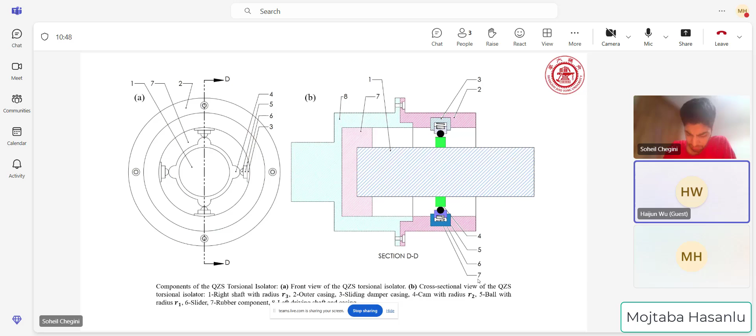My main focus in quasi-zero-stiffness torsional isolation research is on a configuration system like this, which is a kind of coupling. If you look precisely, you can see number 7 and number—an elastic that provides torsional stiffness.

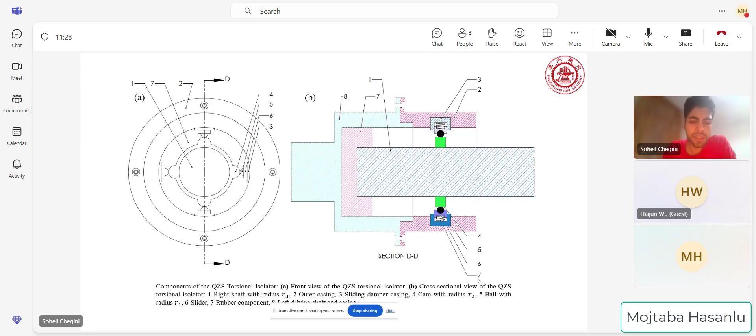Combined with the stiffness of the spring, number 6, you can achieve quasi-zero-stiffness, meaning you have stiffness around zero near the equilibrium point. That means you can lower the natural frequency of the system and achieve isolation at lower frequencies.

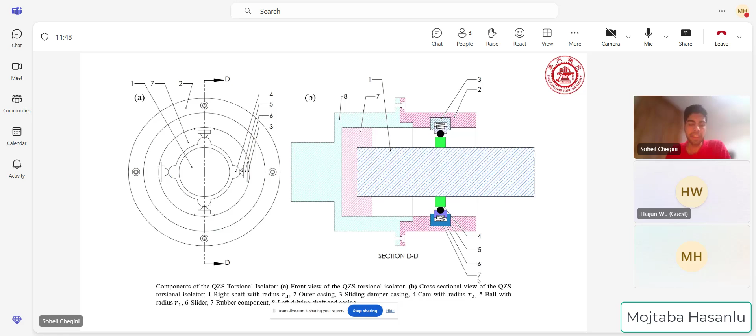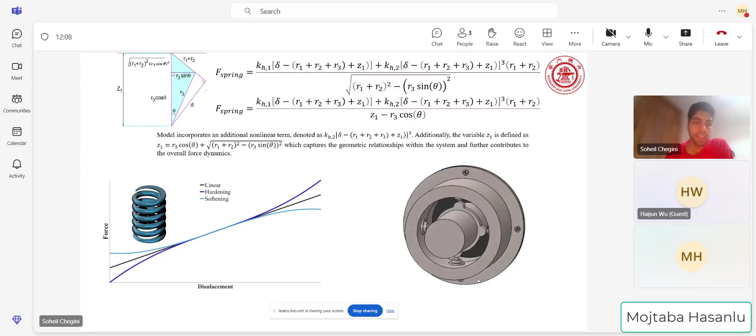This is the configuration of my system and the notation I've used in my research. By calculating the moment of the spring around the central axis and combining it with the torsional stiffness of the elastic, you can adjust the stiffness of the whole system. If you adjust it around zero, you can reach quasi-zero-stiffness characteristics.

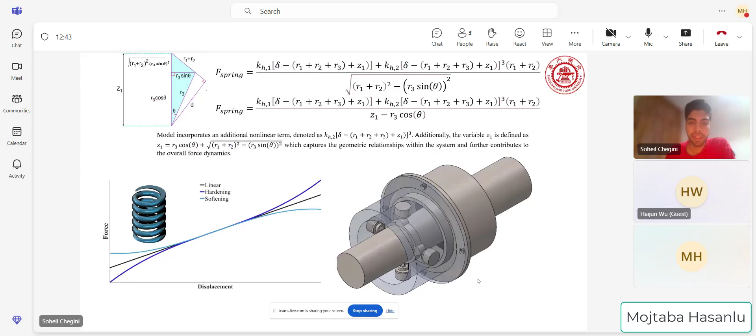My main goal was using hardening and softening springs because of the improvements we can achieve compared to a linear spring. During my research, we saw that by implementing hardening and softening effects for the spring, we can get better results, which I'll show later.

This is my formula for conducting the research. The main feature of quasi-zero-stiffness systems is that their stiffness should be zero around the equilibrium point. The stiffness can be obtained from the derivative of the moment around the central axis, and the moment of this nonlinear system can be obtained by combining the torsional stiffness of the elastic with the spring force times its distance from the central axis.

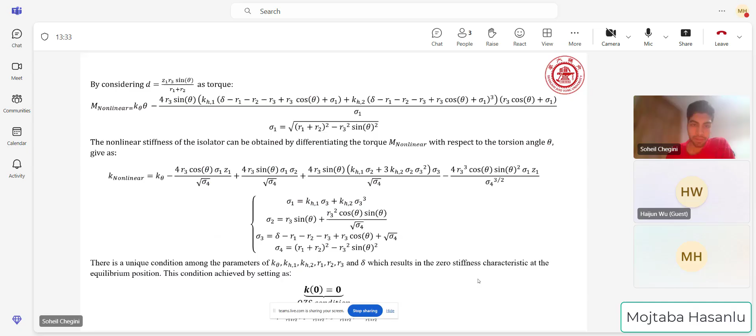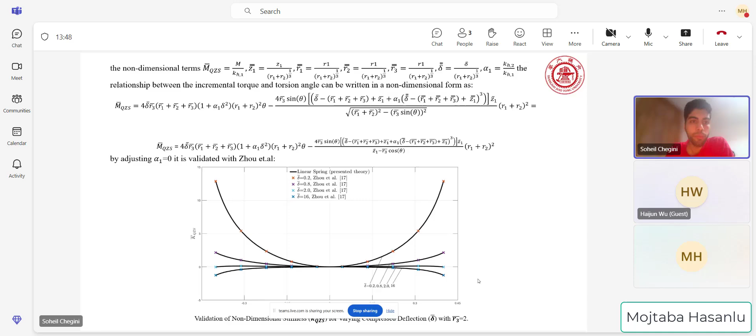It's worth mentioning that if you make your system too softened, it cannot remain stable and becomes unstable. So it's important that the system is not softened to a degree that reduces its stability. If you increase the softening feature of the spring, you can improve the quasi-zero-stiffness characteristics a little, but you must not use a spring that is too softened.

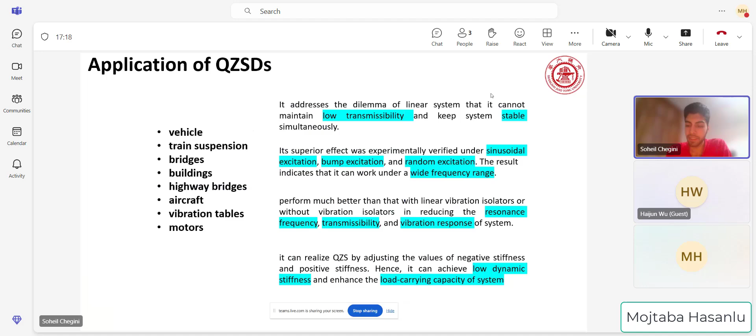I would be happy to use them as devices in many spectra. For example, you can use them in marine applications, aerospace applications, or anywhere you have a harsh environment and want to isolate two systems from one another.

For example, in the context of sensors, you can use materials or any configuration that provides quasi-zero-stiffness characteristics to prevent noise from harsh environments, or anywhere you have torsional disturbance. You can use these quasi-zero-stiffness systems as a device to help increase the durability and healthiness of your system, or prevent fatigue.

I also want to explore the control side of this structure by using a pneumatic or magnetic device instead of a simple spring. You can have controllability over this structure, and make it adjustable to its environment, adjusting the stiffness and damping effect of the device, boosting its possibility to isolate vibration in every environment.

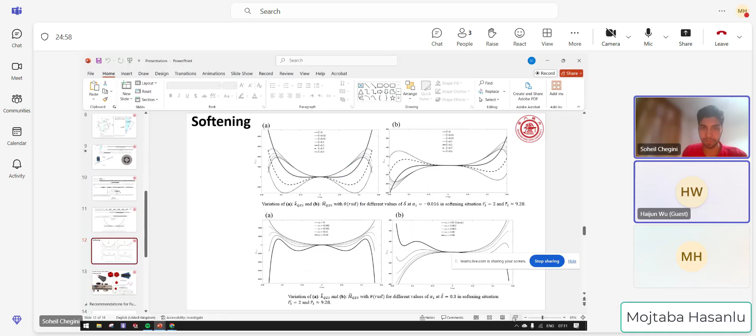I think go to slide 10, 12. Well, okay, slide 13. So you have done research about this. Next, yes, setting, not experiment, it's muffler design. You have also done this kind of research.

So it's about experimental validation, or you design this one? I conducted numerical and experimental research on the absorption characteristics of TPMS metamaterials. So what's the highlight of this kind of design?

TPMS. Do you understand my question? Can you repeat your question? I can understand it. So what's the innovation of this? Okay, I got that.

TPMS structure have not yet been used for a muffler. The main characteristic that researchers and scientists explore and investigate is their acoustical characteristic, but they have not yet been used in the context of the muffler, and they have not researched the STL, or sound transmission, of this structure compared together.

The only work that has been conducted, I think, is on a simple panel of this TPMS or double curve of this structure, and they only considered the normal and radial sound dissipation across this structure.

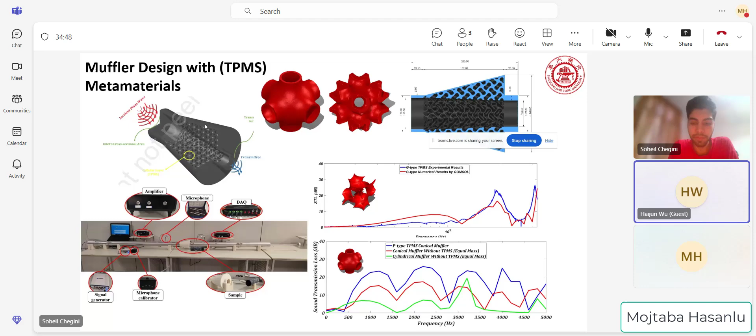Okay, so can you go to your research plan next? This slide you mean? No, previous. Yes, this is isolation, right? Yes, this is a different configuration of torsional isolation.

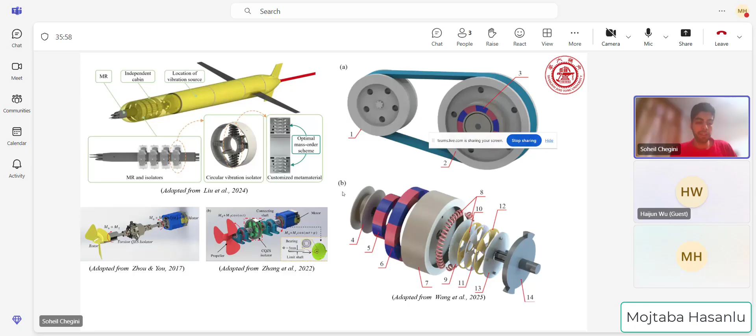Two figures below show a marine application of quasi-zero-stiffness isolators. You have propeller and motor. If you have a harsh environment around the propeller, for example because of the bad situation of the fluid, you don't want this vibration to go to the motor, you want it to dissipate in the middle domain. By designing a torsional quasi-zero-stiffness isolator, you can achieve attenuation of this harsh environment effect.

But it's a little bit different from our research, so let's go to the next slide.

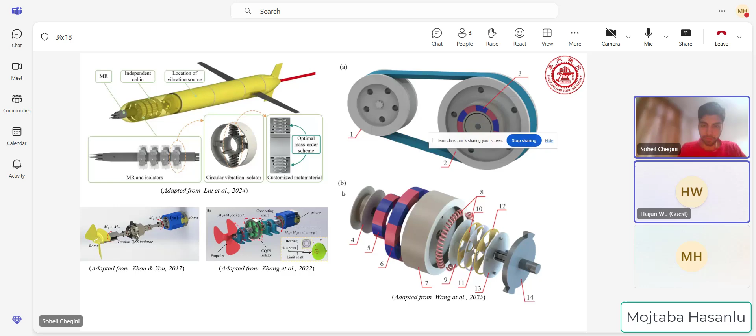This kind of research considers the control characteristics for springs and dampers. You can use a magnetic device or pneumatic spring as a tool for this.

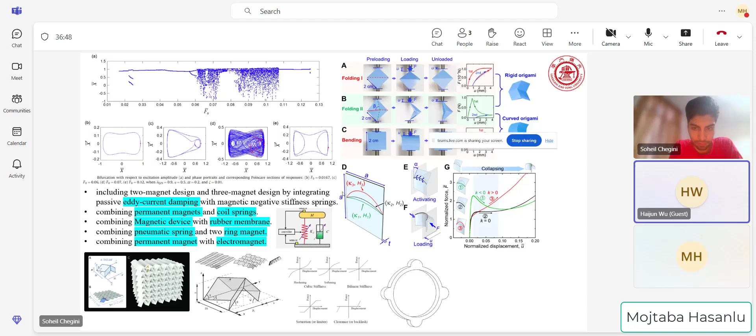So I got it. Any other slides you want to show? Is this the end of your slides? Yes, that is the end of my slides.

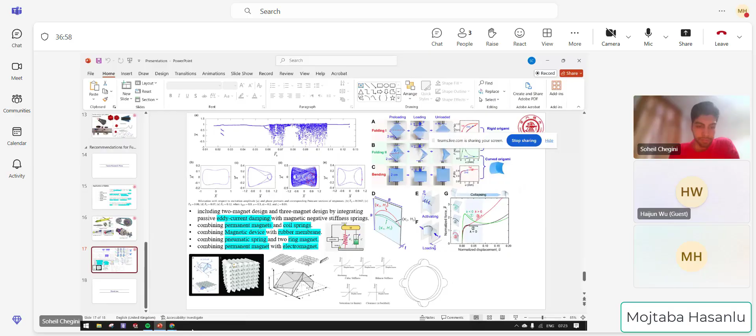Slide 15. This shows the domains where we can use a quasi-zero-stiffness device to attenuate vibration. Under sinusoidal excitation or bump excitation, they show good vibrational characteristics, and you can achieve lower frequency isolation for lower frequency excitation.

So my research is mainly focused on acoustic problems.

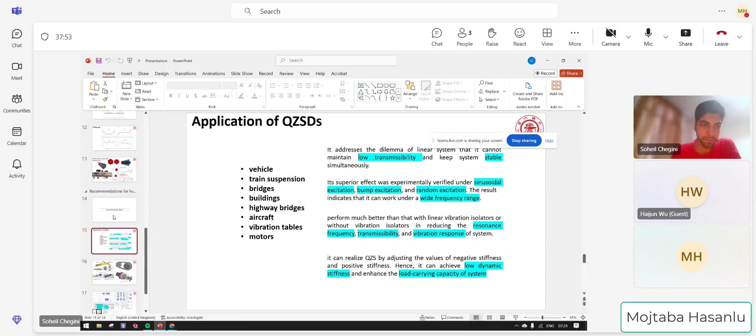Hasanlu, did you tell him what we have done here? Yeah, so something like numerical methods for acoustic simulations.

Currently, I work on acoustic characteristics of origami mufflers. I am familiar with acoustics, though not yet familiar with the deeper theory of acoustics, and I enjoy spending time learning more on the theory. But I've gotten familiar through research I conducted considering the acoustic characteristics of double curved sandwich panels.

With my colleague, a postdoc student, we used, I think, third shear theory to model the acoustic characteristics of the double curve structure. They first extract the mode shape and vibrational characteristics of the structure, and by using those formulations and considering the vibration characteristics, they derive the acoustical response to radial excitation of acoustic waves.